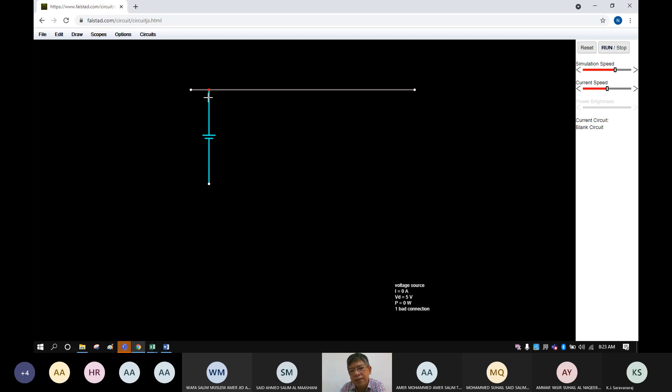So I just want to emphasize that from here, if you connect here, immediately you will see this red dot. Did you see? I start from bottom going up. It means the polarity is negative going to positive. If it is from up going down, what is the polarity? Okay. So what is this red point? What does it mean? It means it is a bad connection.

Did you see this bad connection, brother? Did you see this? Yes or no? Yes. Yes.

Okay. So meaning there is a bad connection here. So we will remove this. We will do the solution for this later. Then we have an ammeter here, and then we have a resistor here. Okay. So here we need to go to draw. Draw the output and label. This is now the ammeter. So ammeter, from here, down ammeter, and then another is the resistor. So we'll go to resistor. So we will connect here.

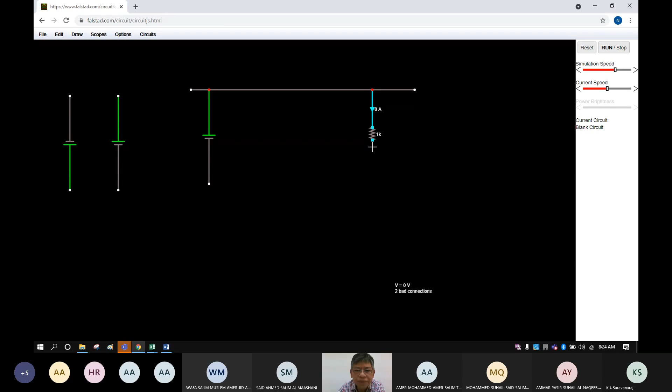Okay. Then it is the wire. So did you see, class? As I told you, I want only vertical and horizontal. So did you see there is a space here? So I want to remove this. I want to delete because I want my presentation to be a good drawing and presentable. So as I told you, the line should be only horizontal and vertical. Okay, is it clear? Yes. Okay, now I want to remove this. Delete and then delete.

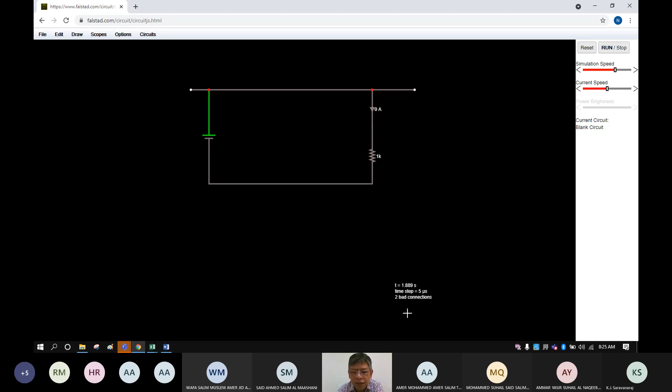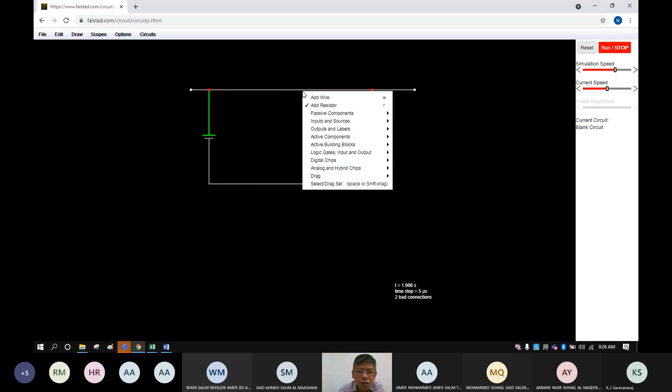Okay, like this. Then I found out that even if I run, what will happen? It's not moving, meaning there is a problem. There are two bad connections here. So where are those two bad connections? This is one. Did you see this red? One bad connection. And then another bad connection is this one. Okay. So to remove those bad connections, I need to edit and then delete this line. Okay, so we need to do the correct wiring.

So if I connect this, what is the problem? There's no problem anymore here. I will run this. So you have 5 milliamperes here. You have 1 kilo ohm here. The question is, how much is the voltage here? Because that is important in Ohm's law. Given is the current, given is the resistance. What is the voltage here? Okay, you can calculate it. You can get the voltage here.

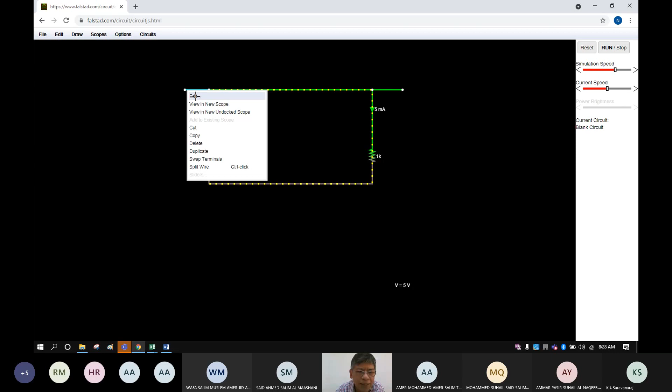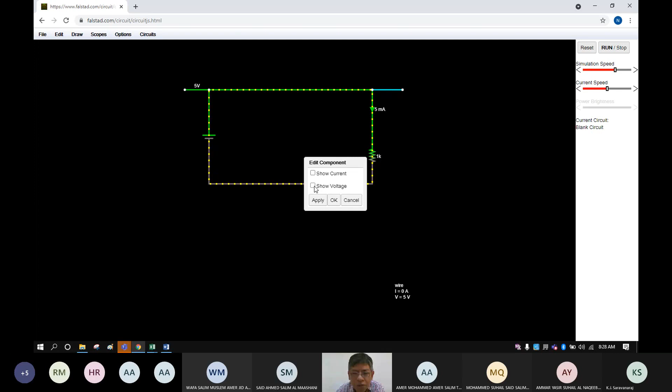Or, aside from that, you just connect a wire. Okay, add wire. I want to know how much is the voltage of this supply. I want to add wire on both sides to know the value of this voltage. So from here, right click, edit, and then show the voltage. It is 5 volts here. Meaning at this line, the supply is 5 volts. How about this? Edit, right click, show the voltage. Okay, so it is positive 5 volts here.

I want to know also here, what is the equivalent here? Okay, add wire from here. How much voltage here? Right click, show the voltage. It is 0. Why 0? Because this is negative and this is positive. Okay, did you understand, class? Yes.

Okay, thank you. Now, the next procedure, because I told you I want a good presentation because that is equivalent to the performance. Go to edit, and then center circuit. Did you see this center circuit? Class, did you see this? Edit, center circuit. You can zoom in and zoom out. So you can use this or even your mouse.

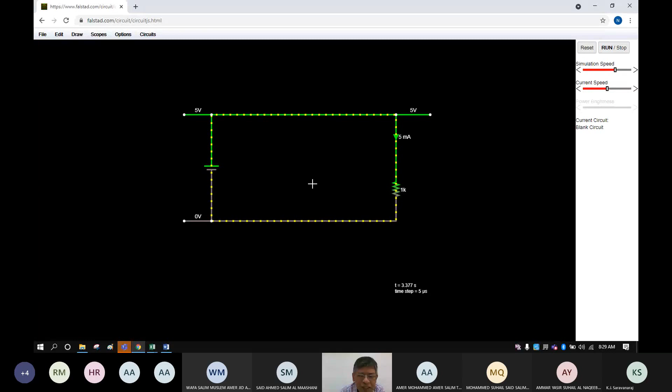Okay, did you see? Don't submit it to me like this, huh? Don't submit it to me like this. It's not visible. So it should be ideal. What is the ideal setup? It's like this. Okay, is this visible? Is it clear, class? Yes. Okay, very good.

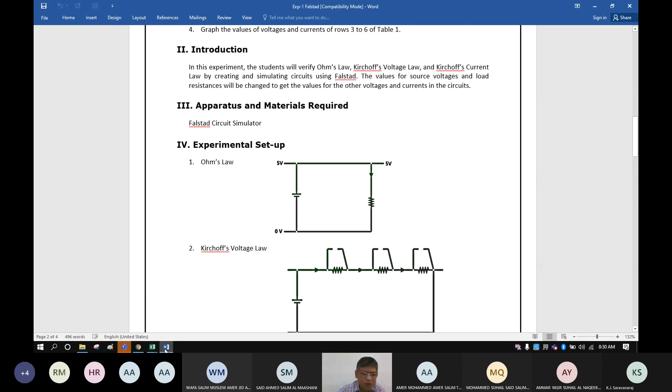Now I want to perform my task. I want to perform number 1 and number 4. So the given resistance in table number 1, row number 1, is 100 ohms and the voltage is 5.

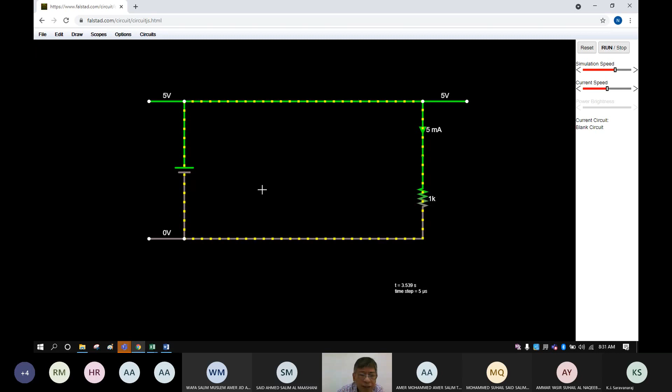Okay, 5 volts. So I will go to my circuit. I will stop first. Then what is the value of voltage? Edit, 5 volts already here, it's okay. And then what is the value of my resistance? Right click, edit, and then I will change it to 100, okay?

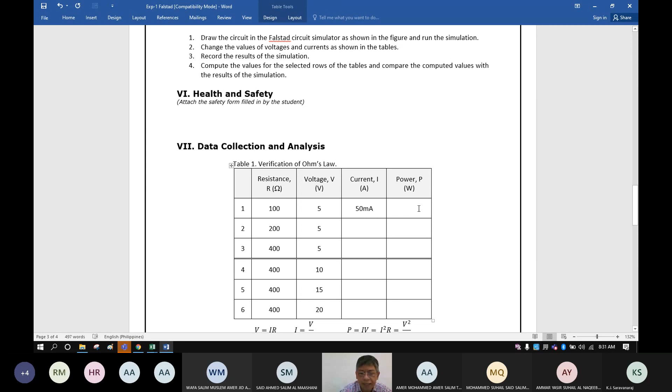Then click OK. Run. So the voltage is 5, the resistance is 100, therefore the current is 50 milliampere. So now I will record here as 50 milliampere. Clear? And then here, what is the power? Using this formula, did you see this formula, class?

The power is equal to current multiplied by voltage, or the current squared multiplied by resistance, or the voltage squared divided by the resistance. So given already the current and the voltage, you can now get the value of power as 0.25. What is the unit? Actually, the unit is already here, watts, so 0.25 is okay. If you want, you can indicate it also. That is row number 1.

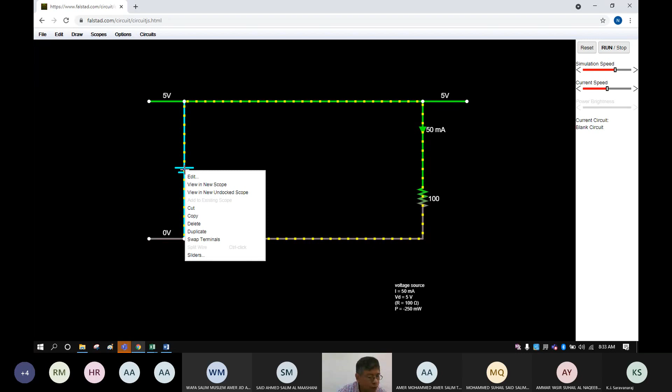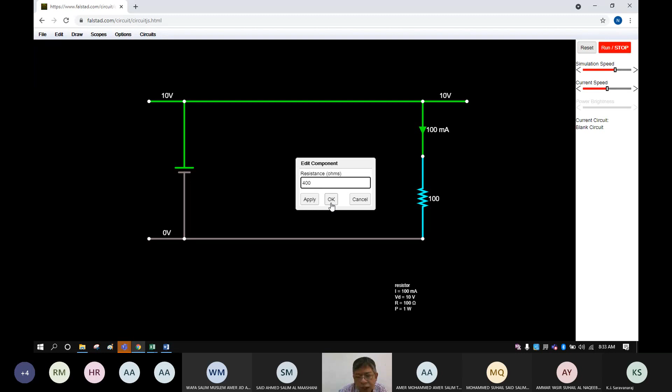Then I want to perform also row number 4. The voltage is 10, and the resistance is 400. In table number 1, row number 4, edit, I need to change this to 10. I click OK. And then what is the value of my resistor? 400. Okay, very good. Then you will click OK, and then you will run.

So the current is 25 milliampere with a voltage of 10 volts and resistance of 400 ohms. The recorded value here should be 25 milliampere. And then using this formula, calculating the power, you have 0.25 watts.

Then we have data number 2, number 3, number 5, and number 6. That is your task. You need to complete all requirements here: row number 2, number 3, number 5, number 6. Number 1 and number 4 are already given, you just copy them, and then complete the other information.

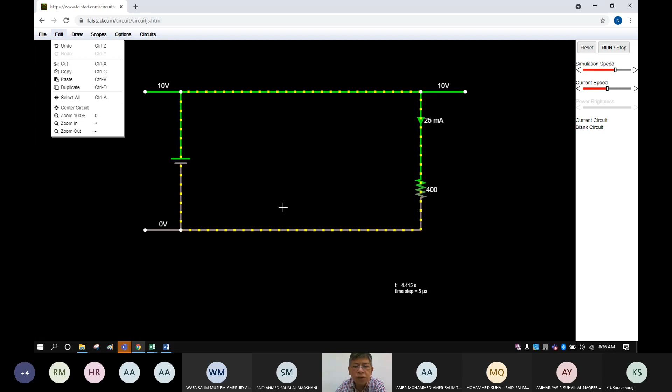Now, aside from this, how would I know you are the one who did the task? So what I'm going to do is go to edit and, as much as possible, center the circuit. You can zoom in and zoom out. If it is visible enough for you, it's okay.

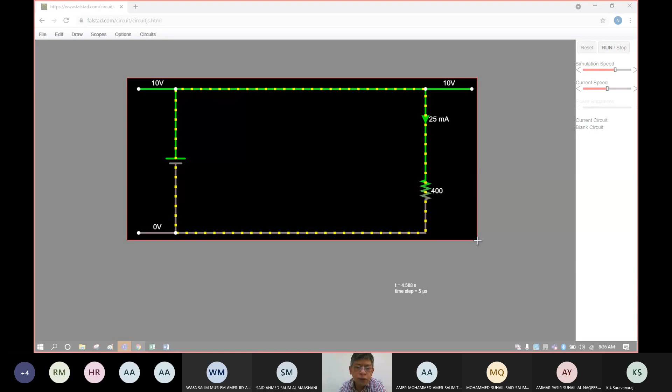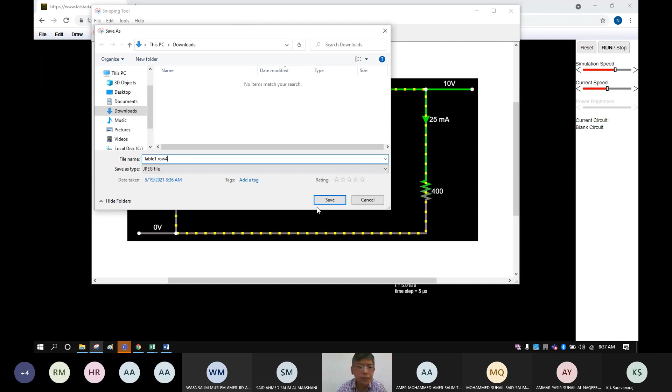Then on your laptop or computer, you have the snipping tool. Click new, and then cut this for your performance. Since my performance is row 1 and row 4, I get table number 1, row number 4. Right click, save as. In my downloads, I will name it table 1, row 4, so that I will not get confused.

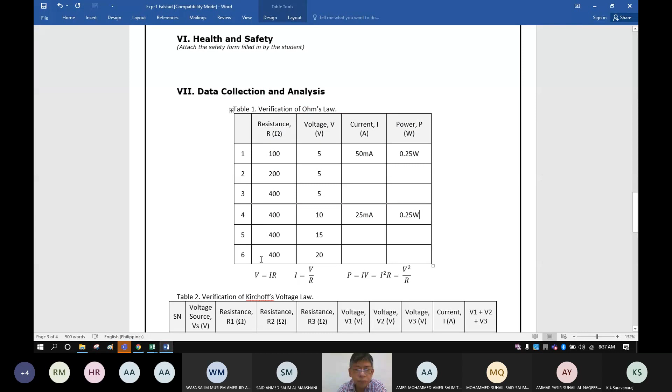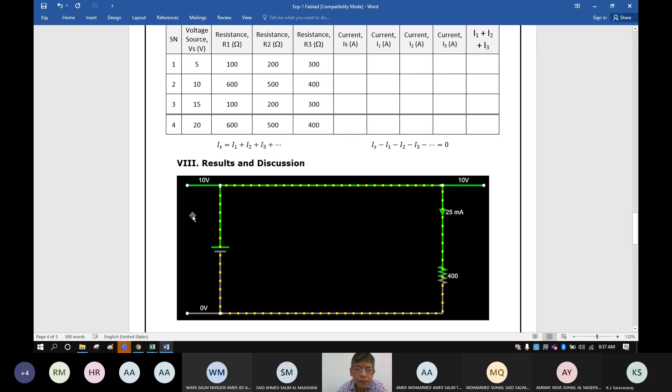So I will save. Then this is now my report. The result I will paste here. Did you see? I pasted the result of my task here. So I will indicate here table 1.

Later, brother. Table 1, row 4. Okay, what is your question, brother?

Teacher, how many pictures do we put? Only one or for all results? You will see later. As I told you, brother, I will perform it, and then one by one you will get your task. Okay. Now, as I told you, this is my task. This is what you're going to do.

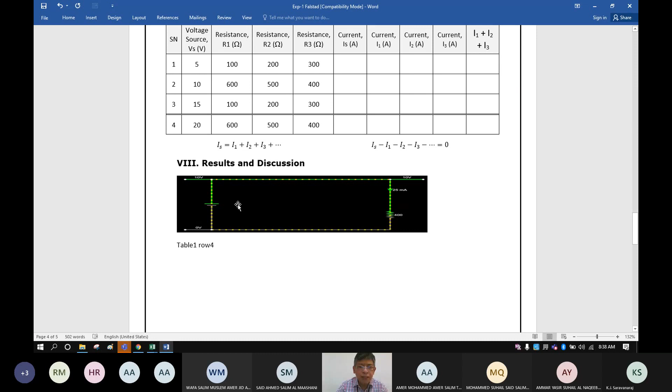In your task, you will copy and paste it here in the result, and then your discussion will follow here. You will discuss how to get this table 1, row number 4 as your discussion, because this is already the result. Okay, class? The discussion will follow from here.

You will discuss now: based on this circuit, this is what I learned. You just explain, okay? Then I will go now to your task, so I will explain your task so that you will understand. Here in experiment number 1, today is what date? 19? Okay, so 19 of May, 05. Okay, so this is now your task.

Abdullah Muhammad, your task is in table 1, number 2. Ahmed Ali, your task is number 2. I will explain later after I type your task. Amer Ahmed, your task is number 2. Open your microphone so that I will know if you are present or not. Amer Mohammed, your task is row number 2. Amar, your task is number 2.

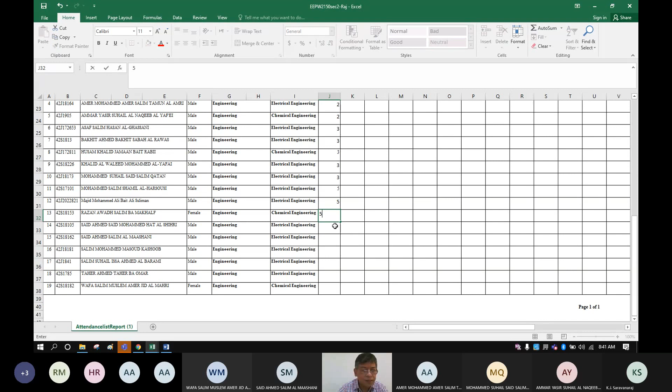Asaf, your task is number 3. Bakhit, your task is number 3. Husam, Khalid, your task is number 3. Khalid Ali, your task is number 3. Mohammed Sohail, your task is number 3. Then Muhammad Salim, your task is number 5. Razan, number 5. Said Ahmed, number 5.

Number 6 for Salim Muhammad. Salim Suhail, number 6. Tahir, number 6. Wafa, number 6. Okay, so here you have your task. Abdullah Muhammad Salim Al-Hakmani, you are there? Open your microphone. Are you present or absent?

Sir, it seems he has some internet problem. He's texting me on WhatsApp. He is present from the start, but he has some internet issue from his side. Thank you. Ahmed Ali Suhail, you are there? I want one student only. Amer Ahmed, you are there? Oh, audio problem, brother. Yes, teacher.

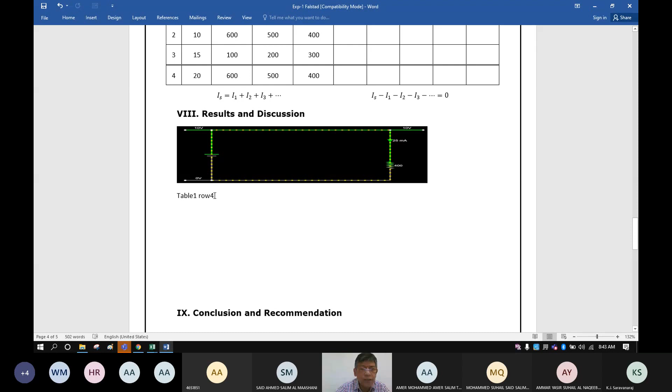Okay, example is Amer Ahmed. So for Amer Ahmed, the task is number 2. So what does it mean? It means for Amer Ahmed, your task here is table number 1 and then row number 2. So this is your task, Amer.

You will perform number 2 as your task, then record that and paste it here. Then put here table number 1, row number 2. But Amer, you still need to complete all the requirements here. All numbers here should be complete, so there is an equivalent answer here. Teacher, table 3?

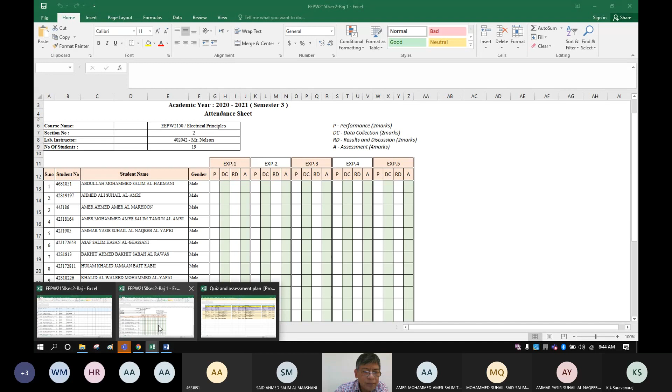What is your name, brother? Tahir? Hello? The one asking a question? Any question, class, if you want me to explain it to you? Anyone not clear about your task? Teacher, table number 1, yes? What is your name? Abdullah Muhammad Salim Al-Hakmani. It is stated here, it is number 2. Did you see this number 2? Yes.

So your task is table number 1 and row number 2. I will see this task in your report, table 1, row number 2, and the equivalent circuit, because you have marks for this result, and then it follows with the discussion. After here, you will type your discussion. So from the table row, your discussion will follow here. Did you understand?

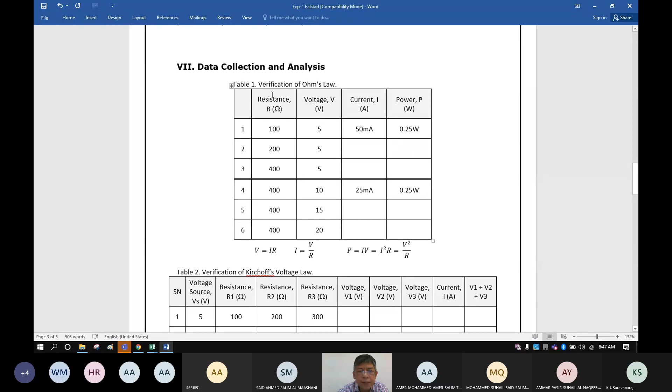Is it clear, Abdullah? Yes, it is clear. But still, you need to complete all the information here, row number 2. You need to complete all equivalents here. So table number 1 is clear, we will leave it now. You already have the task.

So here, we will go to our simulation again. You will go to circuit and then blank circuit. Then we will perform number 2. So what is the circuit diagram of number 2?

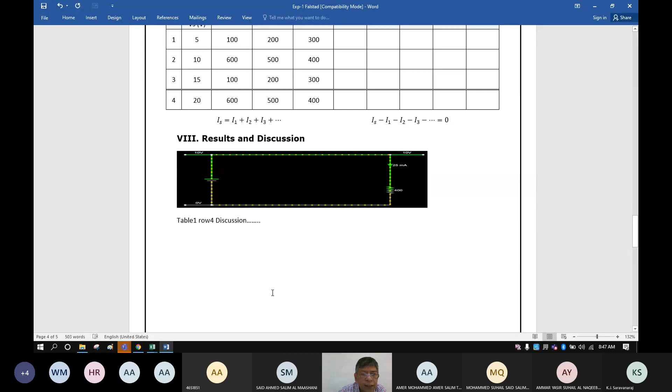So here, how many resistors? So 3. Draw resistor 3. I want you to do it like this so that it's easy and it is a good drawing. Okay, there are 3 resistors. Did you see my presentation? This is a part of your presentation so that it becomes organized and well presented. Okay, then that is the resistor. Then go to draw again.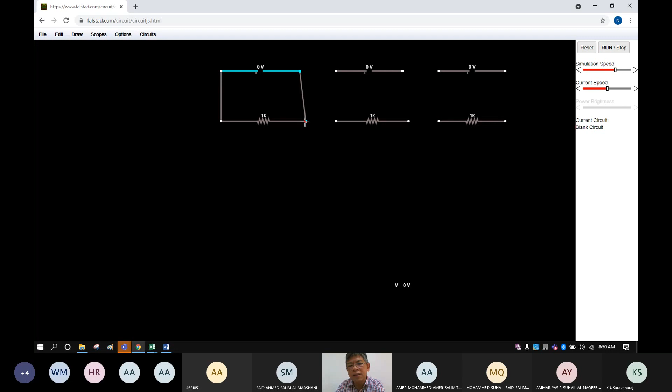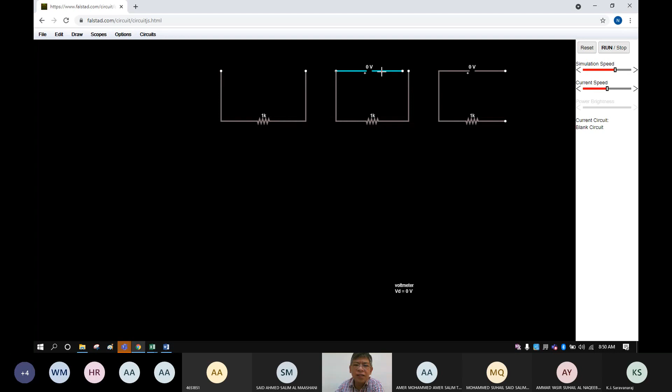So draw again, we need a wire. This is the wire connection. If you think it is not good, like this, did you see? It's not well aligned. So you just put a line here, so that your presentation is very good. Because if you want a good mark, you should have a good presentation also. Okay, like this. I want to change this because it's not in the right label. Then here I will draw the line. Did you see this?

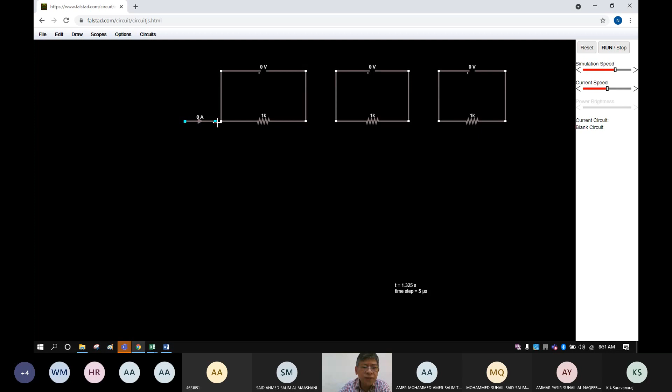Then draw, go to outputs and labels, voltmeter here. Okay, it's now straight. Then draw, go to outputs and labels, ammeter. This is your ammeter. Ammeter 1, ammeter 2, ammeter 3. Then there is a voltage here. Draw input voltage, two-terminal, here. From here going up, so that you're positive here and negative here.

Then wire. This is now your wire. You will add wire here. If you connect like this, you don't follow my instruction. My instruction, as I told you, should be vertical and horizontal only. So this is horizontal, and this is the vertical connection. I want to teach you the proper design, a good design. If you want to identify, there is a current already. Did you see? The current is in series, therefore it is equal.

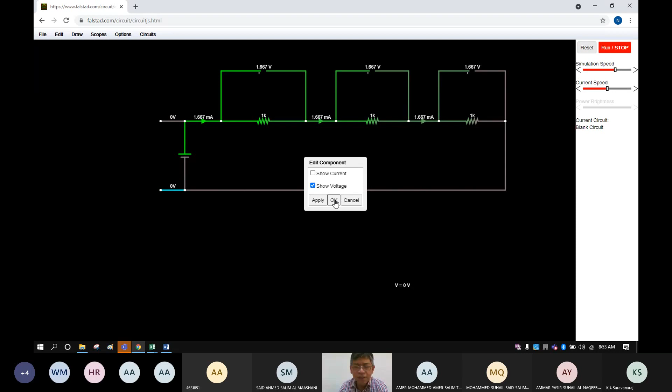There is an equivalent voltage here, but if you want to know how much the voltage is here, you can add wire. Add wire from here, and then another wire also here. Parallel. Because the supply here is equal, let's say edit, we want to show the voltage here. I want to show also the voltage here. Like this. Then I will run. Did you see? How much is the voltage here? Edit, you will see it is identified here as 5 volts. Is it clear?

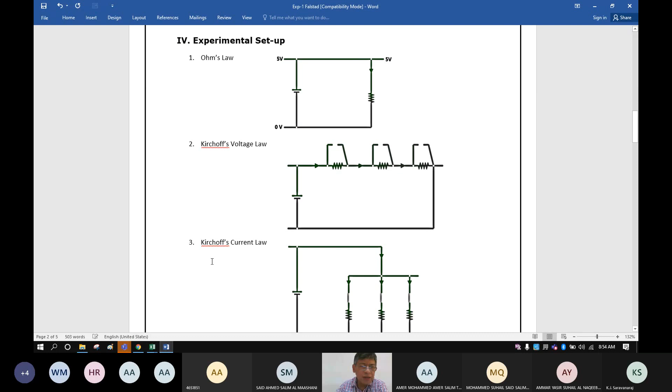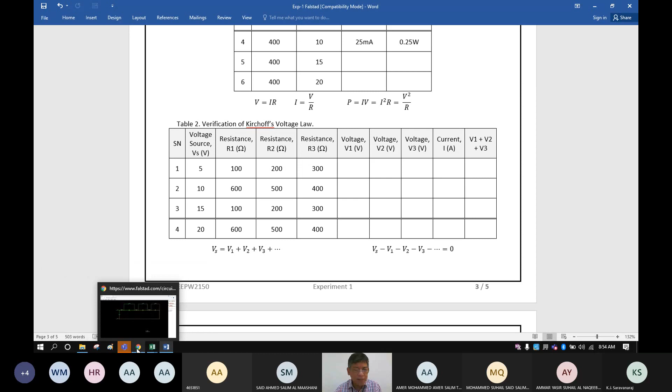Now, in table number 2, I will do my task now. This is table number 2. I want to perform number 4. My power supply total voltage is 20. My R1 is 600, my R2 is 500, my R3 is 400. Now I will go to my Falstad. What is the value of my resistor? Edit. I will edit R1 as 600. My task is 600.

And then R2, right click, then edit. It is 400. Then okay. Here, right click, edit. How much is this one? This is the 400. So this is actually how much?

500. Okay, thank you very much, brother. I thought all of you are not listening.

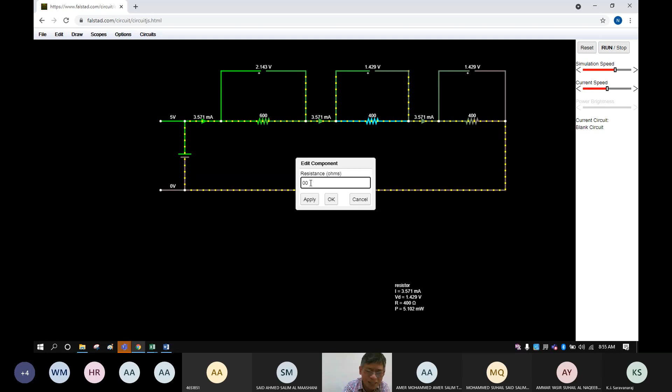This is how much? 500. Then my voltage here, right click, edit. I will change this to 20. Okay, 20 volts. Clear?

Yes. By the way, next week, brother, because you are not aware. Next week in our experiment number 2, please bring also a calculator because I will ask questions from you, and then you have the equivalent marks for that. When you give the correct answer, you have extra mark every time that I will ask you a question about the results, okay, in the next experiment. For experiment number 2, number 3, and number 4, and if possible, number 5, okay?

So this is now our circuit. I have 20 volt supply. I have 600 R1, 500 R2, 400 R3. Across each resistor, this one, 8 volts, 6.666, 5.333. If you add this, it is equal to 20. By inspection, immediately you will see if your answer is correct or not. Adding V1, V2, V3 should be equal to 20.

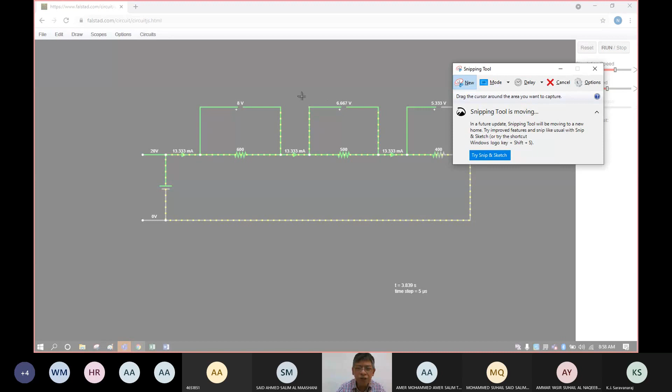the ideal size. Okay, then since this is my task, I will go to my snipping tool. Okay, new, and then I will cut because this is table number 2. I will submit this. Okay, so I will cut. Okay, then right click, save as. I will type here table number 2, row. What is my row? Row number 4. Okay, it is clear, huh?

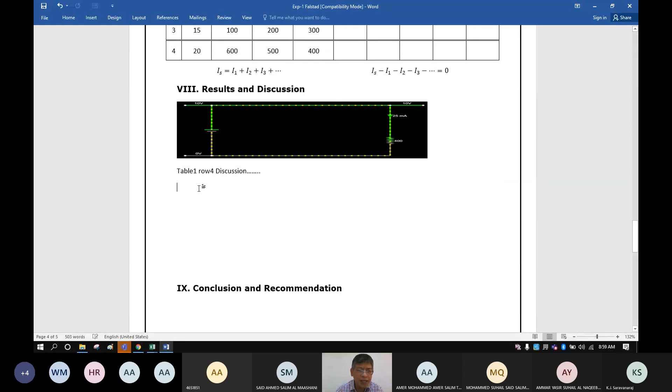Okay, then I will go to my report. This is my report. So here, right click, then paste. Okay, this is now my second task. Okay, did you understand, brother? Answer me yes or no. Yes. Okay, so type here table 2, row number 4. Okay, then your discussion. I need also your discussion here. Okay, then

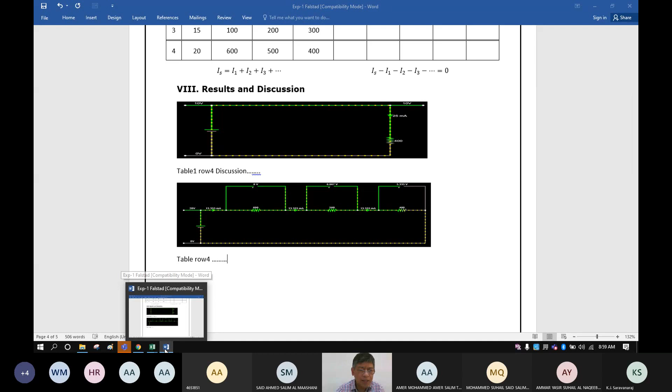here you will record the stated value. It is the equivalent value. As your V1, you need your IS. What is your IS in series? You have total current, 13.3333. Anyway, starting next meeting, as I told you, every time that I have a question, I will ask everyone to answer so that there is participation, and don't worry, I will give you extra mark for that.

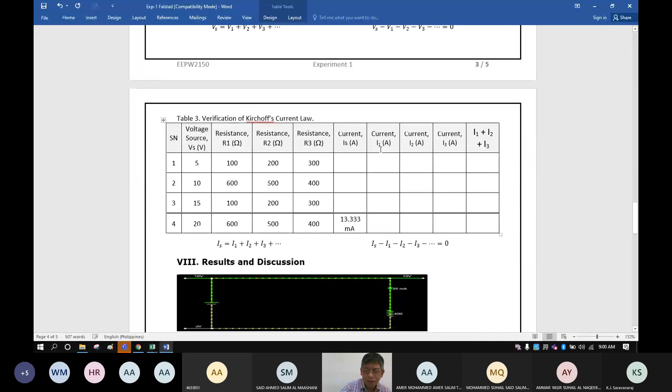Oh, okay. Teacher, this is table number 3. Wrong. It is table 3. Should be in table number 2. Okay, here. Thank you, brother. So voltage 1, how much? 8 volts. Then voltage 2, we have 6.667 volt. And this is already your answer. V3, you have 5.333 volt. Then your total current, since it is series, is 13.333 milliampere. If you add V1, V2, and V3, how much? It is 20 volt. Okay, class?

So, I will give the task for you, number 1, number 2, and number 3, but still, you need to complete the answer for this data, for table number 2. So, I gave already number 4, then I will give your task. Okay. I have a question. Number 1, number 2, and number 3, right? Okay, so for Abdullah. Teacher? Yes, brother.

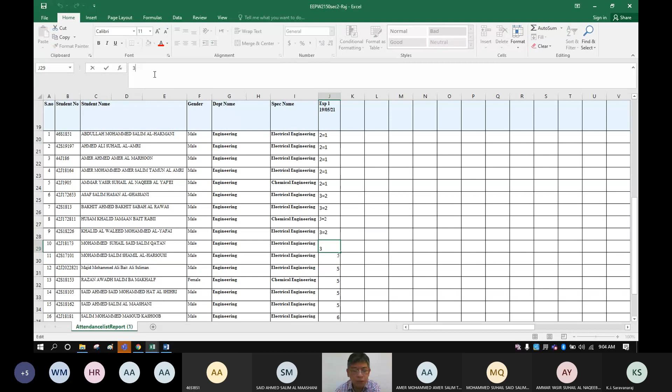Then, Amer, your task is number 1. Oh, what happened? Okay. Your task is number 1. For Amer, task number 1. For Ammar, task number 1. For Asaf, task number 2, row number 2 rather. Husam, row number 2. Khalid, row number 2. Mohammed Suhail, row number 2. Okay.

Then next, still row number 2. So here you have row number 2. Majid, row number 2. Then Razan, row number 3. Said Ahmed, row number 3. Said Ahmed? Yes, row number 3. Salim Mohammed, row number 3. Then Salim Suhail, row number 3. Then Tahir, still row number 3. Wafa, row number 3.

Okay. It is clear. I think there's no question about your task. Your table number 1 and table number 2 task is already here. Okay. Now we will proceed to table number 3. So you have already, this is my task. For the question before, you just discuss how you came up with this. This is your discussion here. How to come up with this, okay?

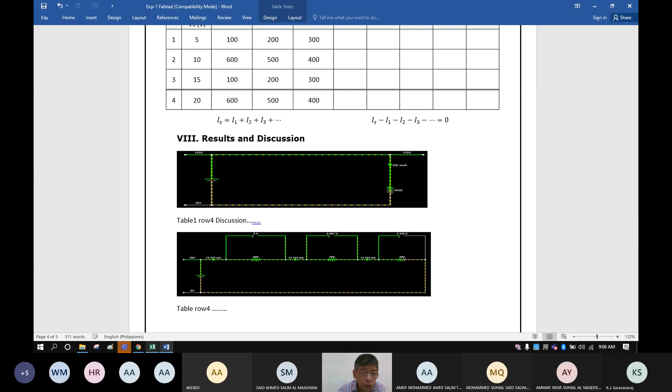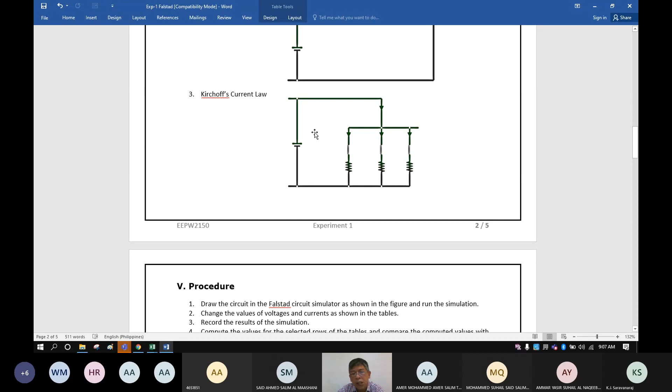Now we will perform number 3. From here, table number 3, we will start from the schematic diagram. So as you've noticed in the schematic diagram, how many resistors again? There are 3 resistors, there are 3 switches, and then ammeters, there are 3 ammeters, ammeter 1, 2, and 3, and then this is for your total current, or this is again an ammeter, and then you also have a voltmeter here, okay?

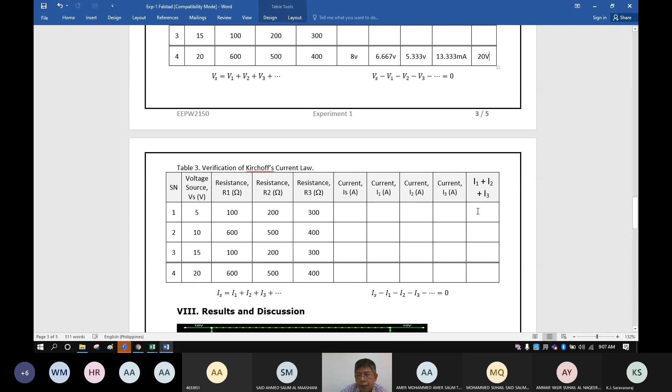So in the table, we need the total current. This is actually the total current, IS, okay? And then if you add I1, I2, and I3, it should be equal to IS. And then if you add this, the IS should be equivalent also when you add this, okay? Like this. So we will go again to Falstad here. Go to circuit, then blank circuit, okay?

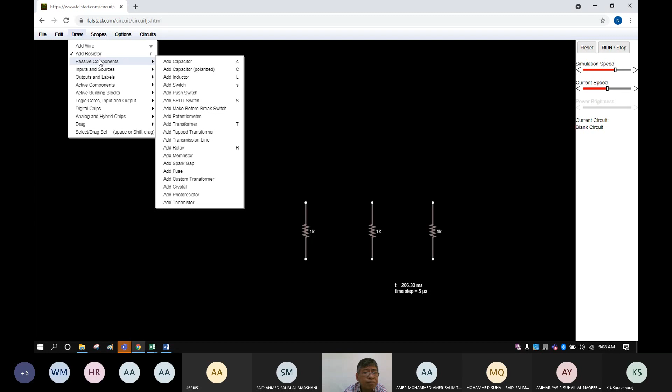Now, you need to draw how many resistors? There are 3 resistors, right? This is the first resistor, okay? First resistor, second resistor. So as much as possible, I told you, it should be only vertical and horizontal so that you have a good presentation, okay? Then you will go to draw. Actually, a switch is in the form of a passive component. Passive component, then you will see the switch here.

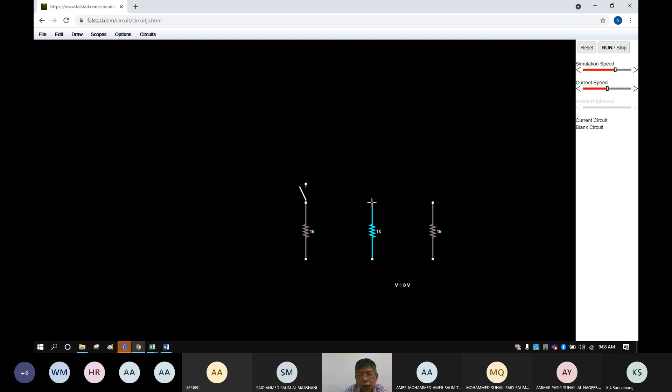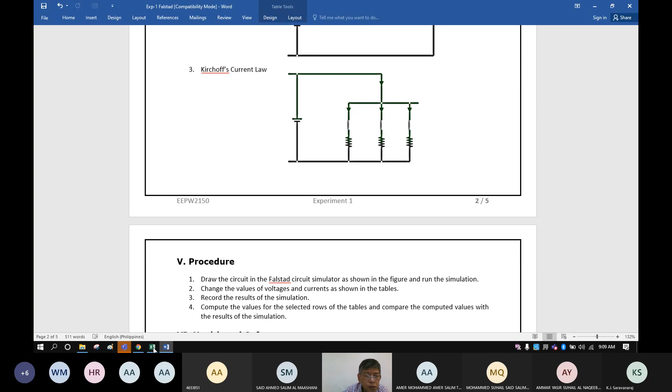Then from here, you will go up. Going up, if you turn on the switch, it should be like this. So therefore, it's better if from here down going up. Okay? Then on. Here going up and then on. So after the resistor or after the switch, what you also need is the ammeter. This ammeter. Did you see this ammeter? 1, 2, 3, and then another ammeter here. So we will insert the ammeter, draw, then the output, the ammeter is in the outputs and labels here.

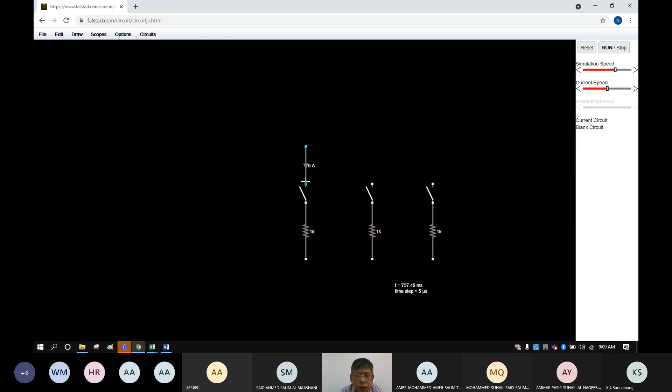So there are 3 ammeters, okay? They should be going down. The ammeter should be going down like this, okay? Because if you put it going up, what will happen? This ammeter is wrong. This is wrong because of the direction of current flow. It should be going down. Simultaneously, all should be going down like this. Then there is also another ammeter here. I want to put a wire so that you will see where this total is. I want to separate this total current, okay? Because I just want to emphasize one thing.

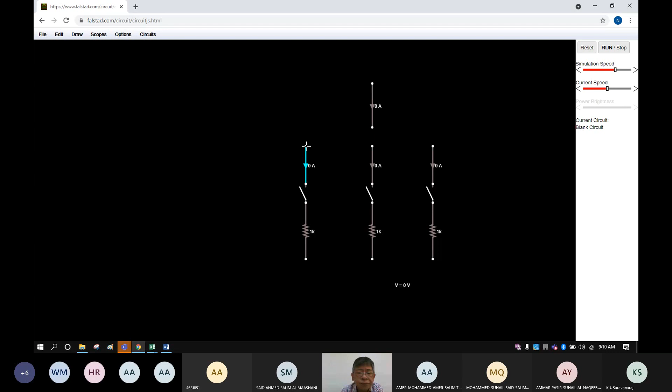So in using the connecting wire, this is to add wire. If you connect like this, you get confused. Did you see what is wrong here? What is wrong here, class? Because of a bad connection, he said, one bad connection. Ammeter number 2 is not connected.

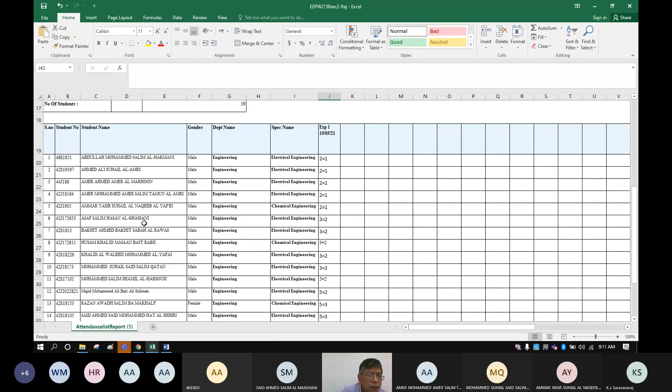Okay, very good, brother. What is your name? Abdullah Mohammed. Abdullah what? Mohammed. Okay. Every time I ask a question, please, if you know the answer, answer it because you get an extra mark for that. So I just want to know if you are the only Abdullah here. Okay, one Abdullah only. Okay, brother. I want your participation, because I want to make sure that no one is sleeping during my class. Okay?

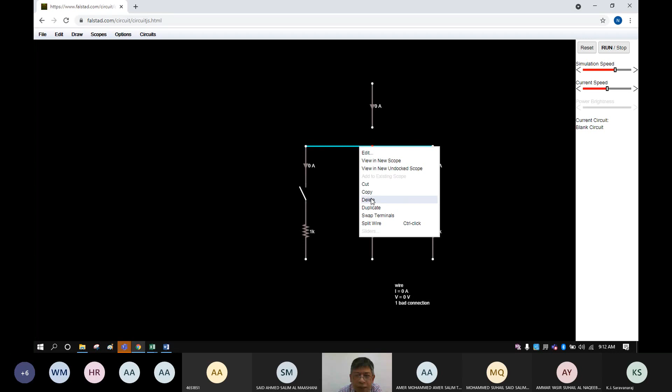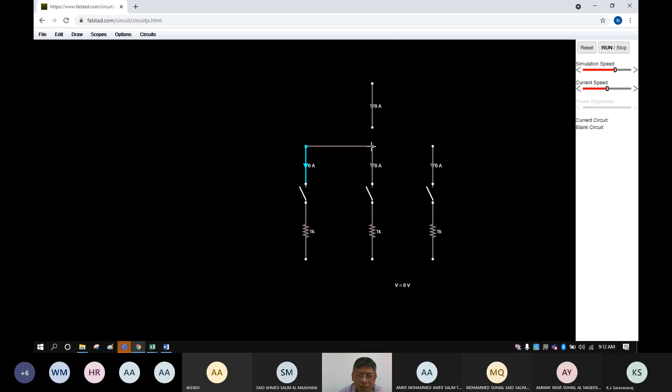So according to Abdullah, the wrong one is this. This is not connected, right, Abdullah? So we need to delete the line or the wire. So what is correct? The correct connection, you know class, if we had a face-to-face class, Abdullah would perform this line. Anyway, maybe next semester or next year, we will perform it. So like this, Abdullah? So this one, Abdullah, is it now correct or not? Correct. Okay, it is correct. So here, you will also connect like this. And then I will connect a wire here like that. Okay, like this. Did you see?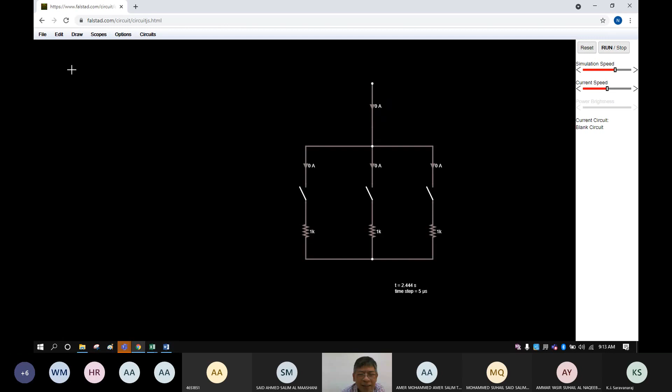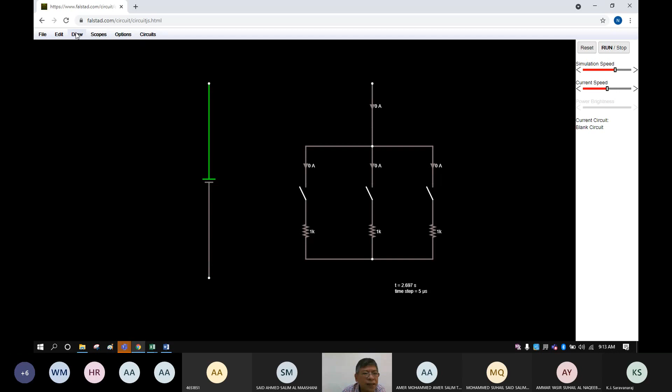Then what is next? You need a power supply. So we need a power supply. You will go to draw, input source, supply voltage here. Supply voltage, I want to start from here because I want a good circuit. I want a good drawing also. Okay, then from here you will add wire. Did you see it is in a straight line? And then you will go also here. Okay, too much. Then another line here. Another line here. Did you see?

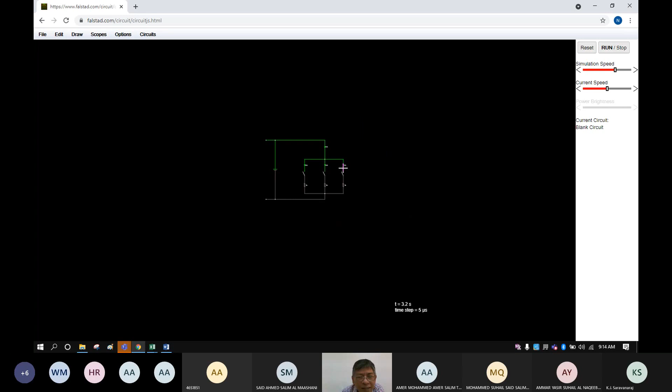I also want to monitor the voltage. I will put a voltmeter here so that we can monitor how much the voltage is here. Okay. Now this is my circuit. I will go to edit, center circuit. This is center circuit. Did you see this center circuit? I will click, then it is now in the center. I want to zoom in. I want to zoom out. So if you want to get zero in your performance, you will submit like this. Okay?

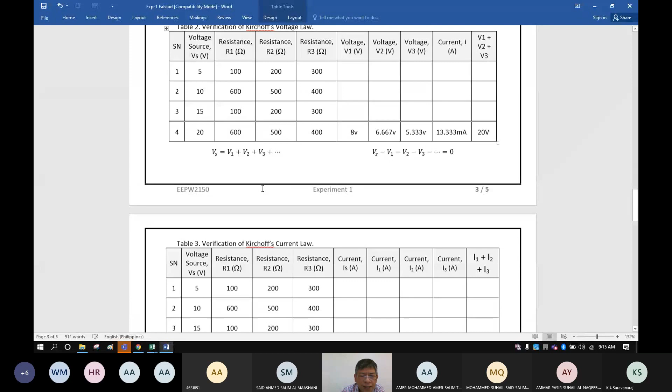Okay, I have a total voltage of voltage source 15. R1 is 100, R2 is 200, R3 is 300. Okay, I will get the total current 1, 2, and 3. Okay, so I will start from my first presentation. So what is my total voltage or voltage source? I have 15. 15 volts here.

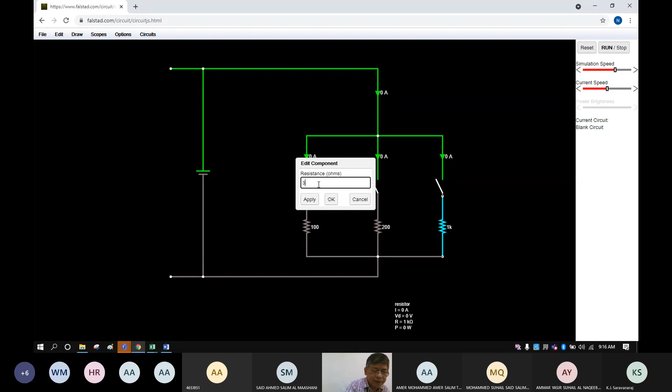Okay. Then, with respect to resistor, R1 is 100. 100 ohms. R2 is 200. Okay. And R3, we have 300. 300. Okay. So I comply now with my requirements.

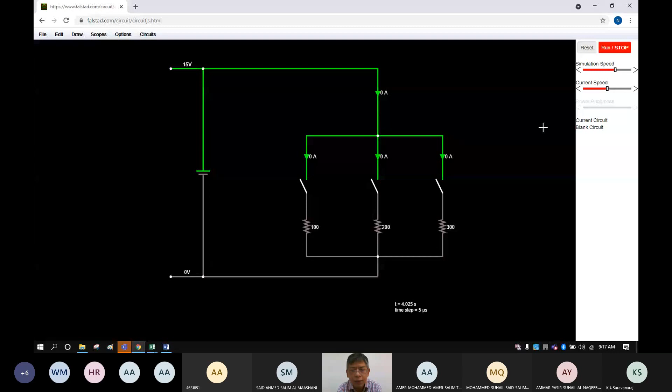So from here, I want to monitor how much voltage, edit, then show the voltage. Here also, I want to show the voltage. Okay. Now I will run. Oh, what happened? Why it's not running? Any answer? What is the problem? Because the switch is turned off, I guess. Huh? The 3 switches are turned off. Okay, open the circuit. 3 switches are still open.

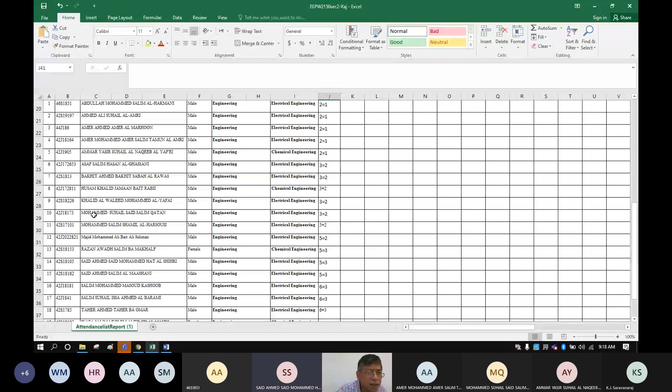1, 2, and 3. What is your name? The one who said it's not running because of the 3 switches. What is your name, brother? Ammar. Ammar Yasir. How many Ammar in the section? Only one Ammar. Okay, Ammar. Very good, Ammar. As I told you, every time that I ask a question, please give the correct answer, and then you have extra mark for that. Okay?

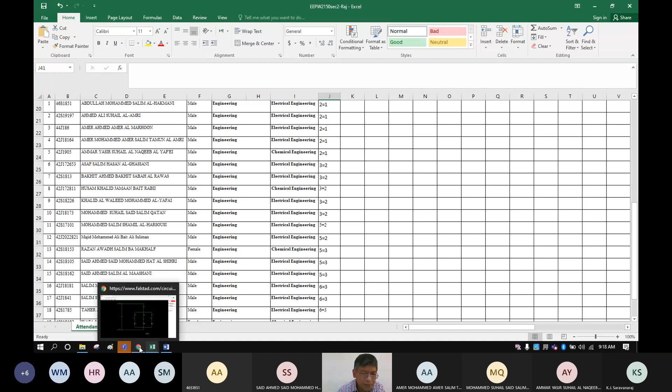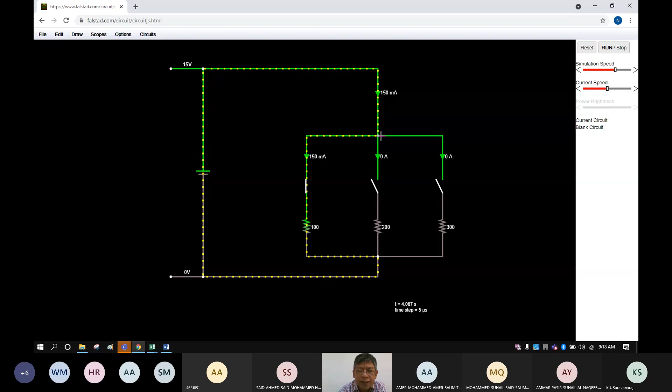Okay, according to Ammar, it's not running because of open circuit. If I close this circuit, what will happen? Now, across 100 ohms, I have 150 milliampere. Okay? Across 300, I have a current of 50 added to 150, total of 200. If I close this, total of 275. This is my voltage. This is my resistance 1, 2, and 3. This is my individual current, and this is my total current.

Okay? Clear? So now, since my task is 3, my total current is how much? 275 milliampere. So current 1, how much? 150. Okay. Take note about this, class. It is stated here, it is in ampere. If your answer is only a number, but your number is in terms of milliampere, I will mark that as wrong. You can make sure the unit is correct and equivalent. I'm not using ampere here because my value here is in milliampere. So take note about this. If you write it the wrong way, I will give you 0 mark for that.

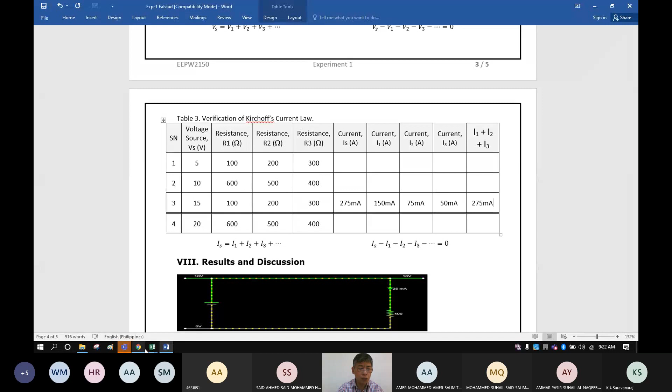Then here it is in milliampere. As I told you, mathematics is a perfect science. So if you add I1, I2, and I3, what should be the answer here? It is 275. Don't forget the unit. Okay? Is it clear? So this is my task. So I will go back to my task.

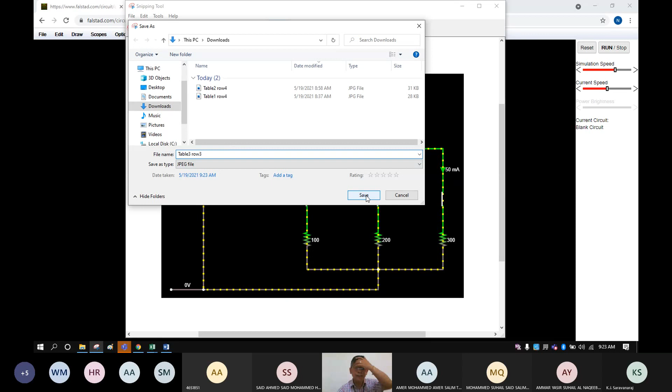So in your laptop and computer, you have the snipping tool. Click new, then cut this. It is easy to do this. Save as. This is table number 3, row number, what is my row? Number 3. Okay, then I save this. Then I will go to my report task from here. Paste my report here.

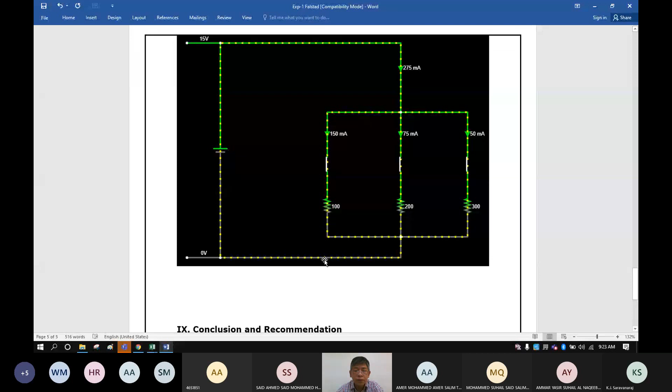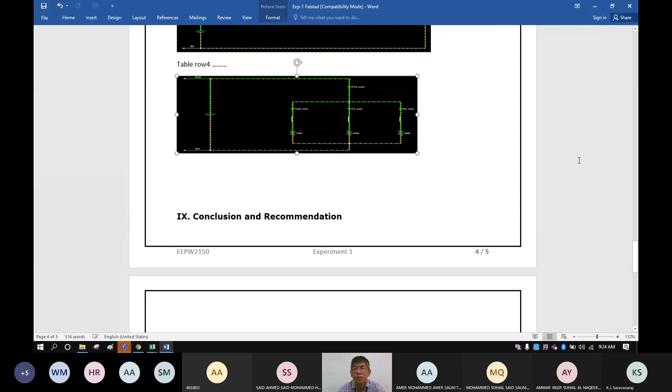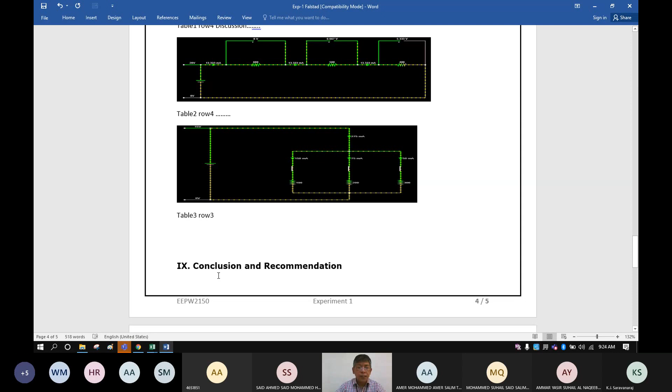Okay, so it is visible, right? As much as possible, make it visible. So this is my table. What is this, table number 2? This should be number 2. Now I have table number 3, row number 3. Then save. Don't forget to save. Okay, brother?